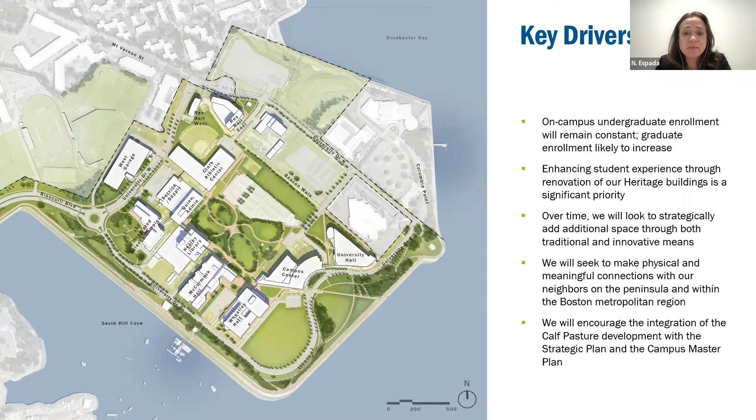This is about integrated healthy campus elements and value—very important, so I'm just going to touch a little bit on it. We want it to be intuitive and accessible, with better outdoor connectedness. We want recreation to be part of this with additional green space and plantings. We want to use the campus as a living lab, and we want wayfinding that simplifies pedestrian connections and promotes orientation.

It's very important to celebrate cultural heritage and find out how to do that on campus, to increase outdoor comfort, and to have more transparency between indoors and outdoors. We want to make sure there are human-scaled elements throughout the campus so that pedestrians, students, staff, everyone feels comfortable and welcome. And we want vibrancy in all the buildings and outdoor environments.

Transit connections and bicycle networks are really important, along with showcasing campus sustainability—we'll talk a little bit about that in a second. And then the other one is signage and receptacles for managing waste and resources.

For sustainability, we're following Executive Order 594, which calls for a 95% emissions reduction. We're doing it in 3 ways: through energy efficiency, minimizing fossil fuels, and on and off-site renewable energy. This is all coordinated with the strategic plan and the energy and carbon master plan.

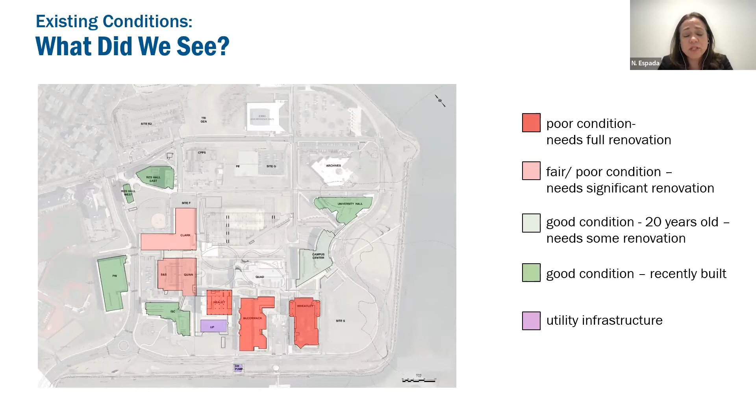So this is the big picture of what we saw, and the heritage buildings are the ones that we know need the most work. The summary is that there's a significant disparity in equity in the condition of the buildings on campus. Besides roofing and elevators, the original heritage buildings have had minimal renovations.

So again, those need to be prioritized. The newer buildings are in pretty good condition. And then there's an opportunity with the new landscape quad, the SDQD project, and major upgrades to campus utility systems—new work that is going on campus and is really going to transform the campus.

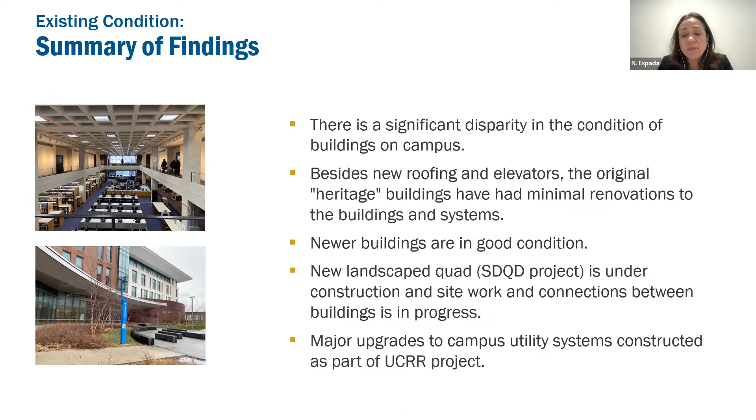In addition to Susan and Natasha from Studio NA, I'm also joined by my colleague, Beth Long, who has really done the bulk of the work in these slides you're about to see. Natasha has walked us through a whole series of qualitative issues, conditions of buildings, sustainability, and guiding principles. We're trying to use those as the foundation for this plan to create a flexible roadmap for UMB's future. But we also need to take into account quantitative issues, focused on space.

But we are not proposing to do that all through new buildings, so that's, we think, good news. Building on Natasha's point about the heritage buildings—Wheatley, McCormick, Healey, Quinn—those buildings can really be much more flexible and efficient through renovations as opposed to building new. So we're suggesting significant renovations to all the heritage buildings to increase the utilization of existing space.

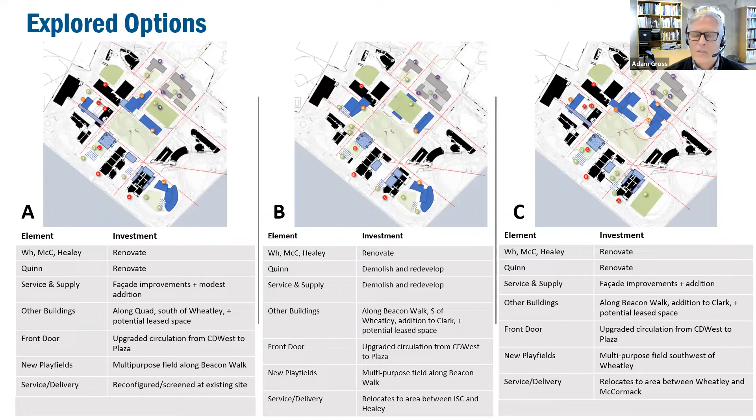Go to the next slide. That is really about building on a lot of the opportunities that each one of those individual plans show, but this kind of coalesces the best ideas from that plan.

And it begins with trying to create a better first impression to campus. So when you come in to campus, we really want to improve the current condition from being the back of a loading dock to something that's more attractive and more health inspiring.

To do that, we're showing the possibility of relocating the central receiving between McCormick and Wheatley. And by doing that, we can free up the space to accommodate a new building.

The other thing we're trying to do is really reinforce the north, south, and east-west connections so that we can open up views to the water. Someone this morning referred to this space over here between Healey and the Science Building as the road to nowhere, and we have some proposals for that.

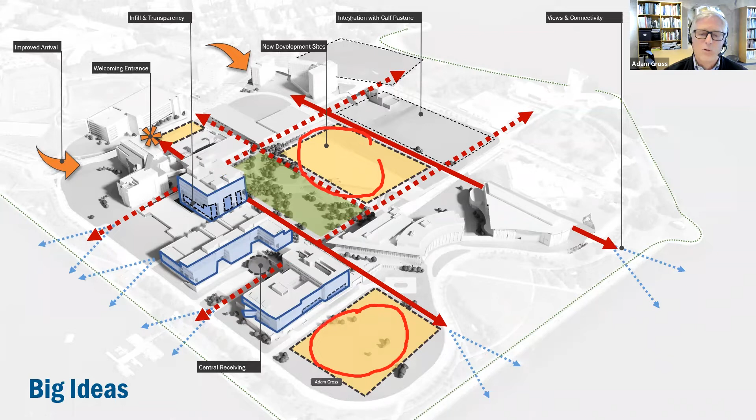And then the big land bay development areas for new buildings are north of the quad and east of Wheatley. But all of this blue that you're seeing in here is showing massive renovations to Wheatley, Healey, and McCormick over time. So with that in mind, we came up with a concept diagram that looked at where all this new needed student life space is going to go.

So currently the student life space you see on the left is in these golden areas, kind of quite small and not very tied together.

And what we see as a future plan is to have this kind of ring of student activity spaces around the new quad, so that when you're in that quad, you can connect directly to ground level activity spaces that are internal. Some of them could be teaching spaces, some of them could be meeting rooms, some of them could be student clubs—really focus that activity on the quad.

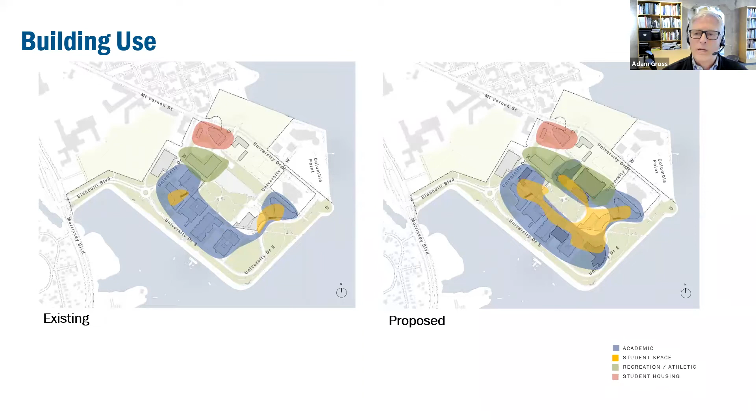But when you add in the renovations of Healey and McCormick, you can start really getting to parity with our overall space goals. So it really is about trying to better define this quadrangle, activate it with new student life activities on the ground floors. We're also introducing a new athletic field, so we don't have to rely as much on our neighbors to the north, and underneath that athletic field we're recommending tucking in a couple levels of parking.

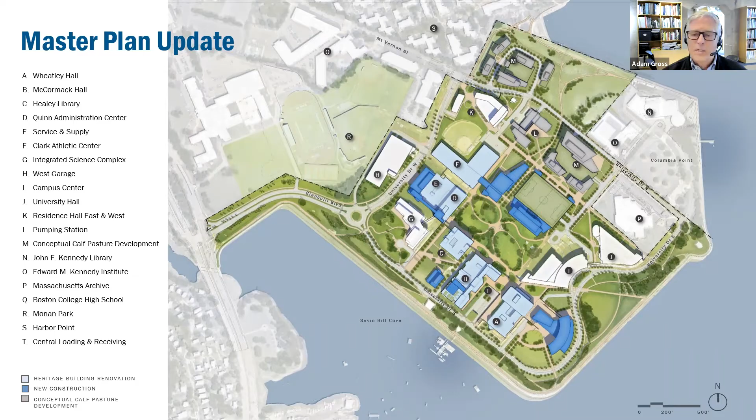So that's a two-dimensional look at what we're proposing. This next slide is a 3D look - you're up in a balloon kind of over the southeast corner of the campus, and you can see this very significant new academic building out on the point.

The blue areas indicate where we would be renovating Wheatley, McCormack, and Healey. It shows our new gateway building at the far west end of the quad, the new parking garage with a green roof on top, the new student life and rec building, and then a new academic building here as well.

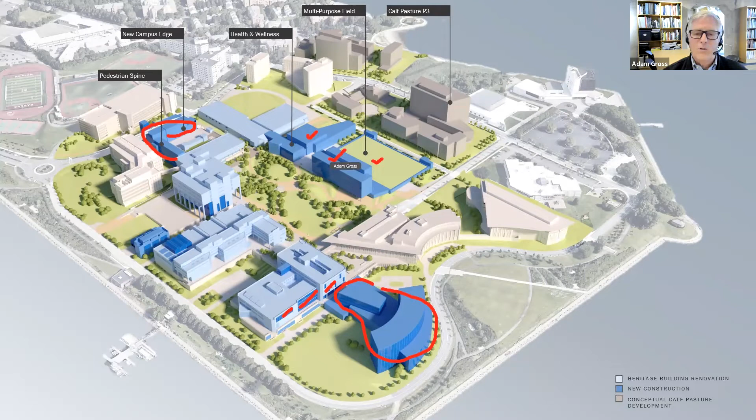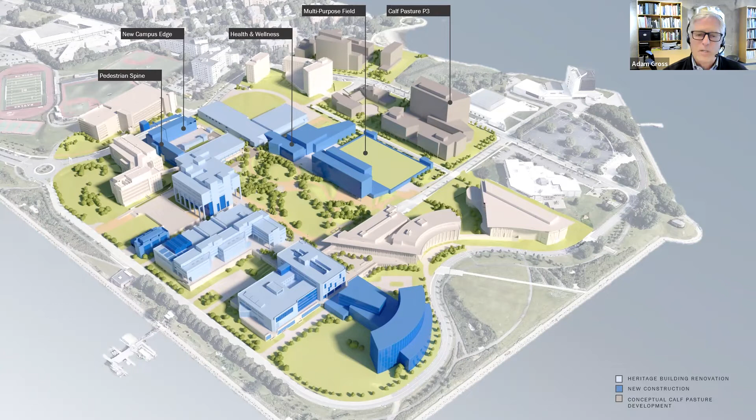This plan would not all be built at once - it would all be reliant on funding and phasing, but it gives you a sense of our goal of having a flexible roadmap based on principles and the goals that the chancellor and others have articulated through our process, to really build a more healthy, equitable, and welcoming campus.

So the next slide is a view from the other side, looking over the parking garage at that current entry where you come in today and you're greeted with the loading dock and dumpsters adjacent to the science building.

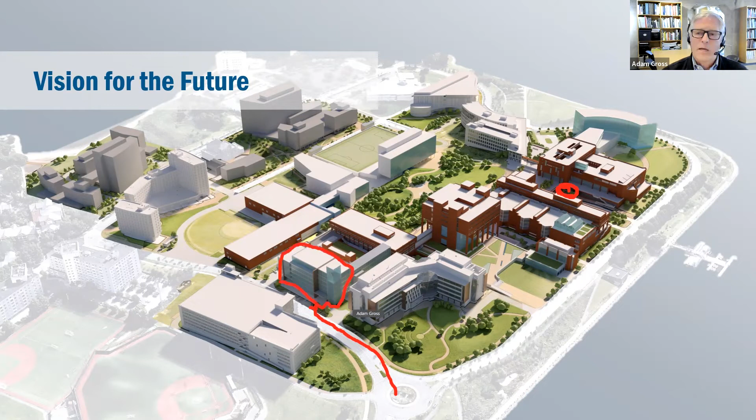What you're seeing here is an idea of the loading being relocated over here by McCormack, which would allow us to position a new building on this site - one that could contain a kind of welcoming tower, glass towers you'll see in a second, with a cascading staircase and escalators that would get you up to the main quad level in a more elegant and easy way. Your first impression would be dramatically changed as a first-time visitor or daily user of the campus.

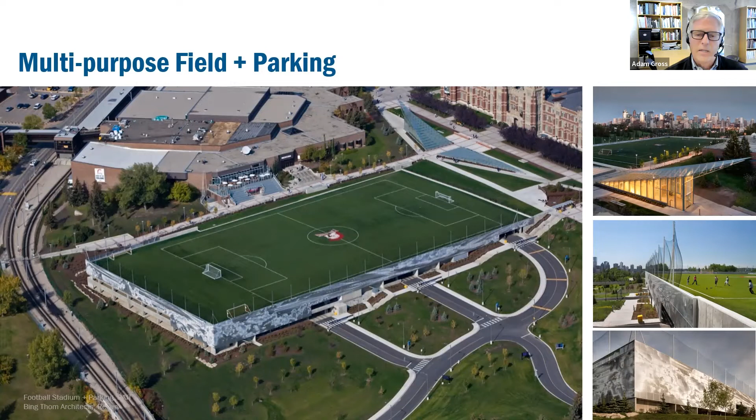We talked about an increase of parking, but also an increase of field space. So this is an example of a parking garage that has an athletic field on top of it. This is the recommendation for the area north of the new quad, which would then be lined by a new academic building to the south.

So those are just some vignettes of what we could envision, but we now really want to dive into how we might think about renovating the heritage buildings and how we could make Wheatley a prototype that would create a building on par with all of your other new buildings, and really create that equity between quality and quantity of space.

So we begin by looking at what type of spaces are in Wheatley or want to be in Wheatley. What we discovered is there's a need for smaller classrooms in the range of 30 to 60 seats, a need for additional class labs to serve engineering and chemistry, and a need for a lot more student support space, as you saw in those earlier charts.

Glass, we think, is something that really could benefit the classrooms themselves and still deal with issues of projection, through flat screens and high definition projectors. Almost all the new teaching and research spaces that we're doing now are incorporating more glass and transparency.

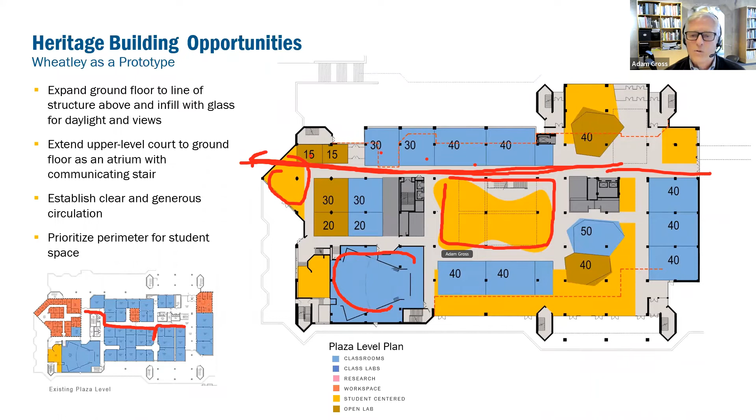So the next slide shows some examples of what these spaces might look like. That big atrium space could look like this, the lounge spaces of the project we just showed you, flexible labs and maker spaces and workspaces, open areas to the quad and to adjacent McCormack, and then a whole range of different types of classrooms.

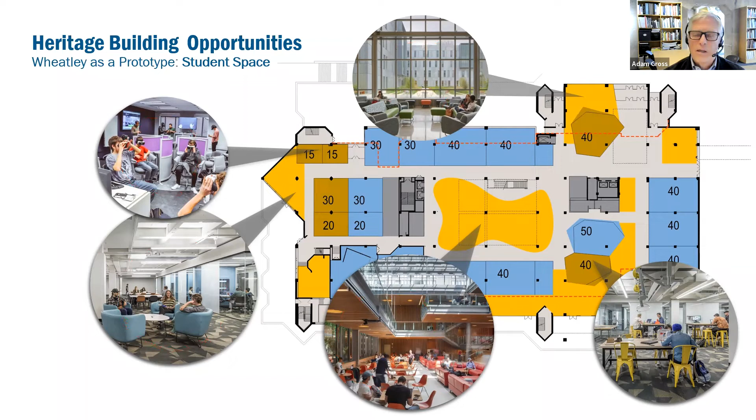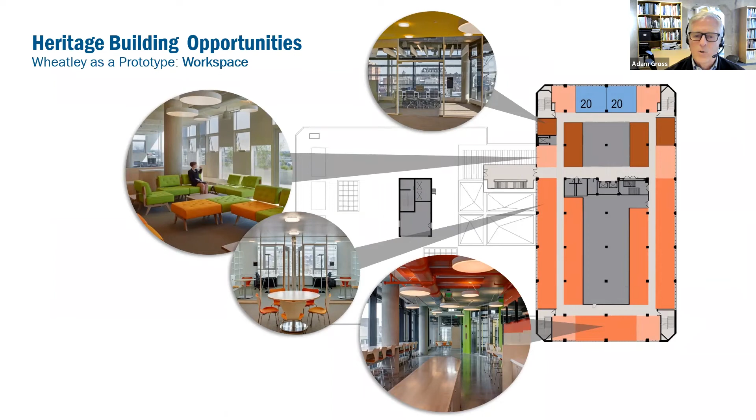So that is a pretty quick snapshot. I'm going to turn it over to Dennis just to talk about how this all applies in terms of our goal of connecting it back to the strategic plan. Thank you, Adam. Thank you, Natasha. And I just wanted to go quickly over this chart.

Create a physical campus that connects to the community, where we have reciprocal engagements, meaning that we go out to the community and the community comes to UMass Boston. And then the fourth is really our very important principle of becoming sustainable and resilient and having a nimble future.